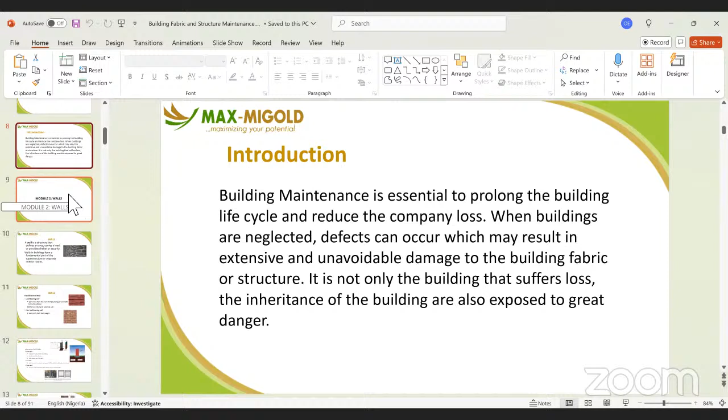So it is important for us to always maintain a building from time to time, check the different components of the building and how it works. Now we shall be looking at the building into different components, different modules.

We're looking at walls. A wall is a structure that defines an area and carries a load or provides shelter or security. Walls in buildings form a fundamental part of the superstructure or separates the interior rooms. Walls is that part of the building that transmits the building load to the foundation, and the foundation transmits it down through the earth.

Foundation is that part of the building that has direct contact with the earth, with the ground, the earth crust, with the earth itself. And every building must have a foundation. There are different types of foundation, 4 basic types, just for classification.

There are more subheadings, but the basic classifications: you have the strip foundation, you have the pad foundation. Strip foundation is a traditional kind of foundation where you just dig through the ground, you pour a little bit of concrete, and then start setting blocks up. A traditional way of building.

Pad foundations are majorly used for the underneath of columns. If you go around and you see street lights, you see these concrete cubes that are underneath the street lights where the street light stands on. Those cubes are called pad foundation.

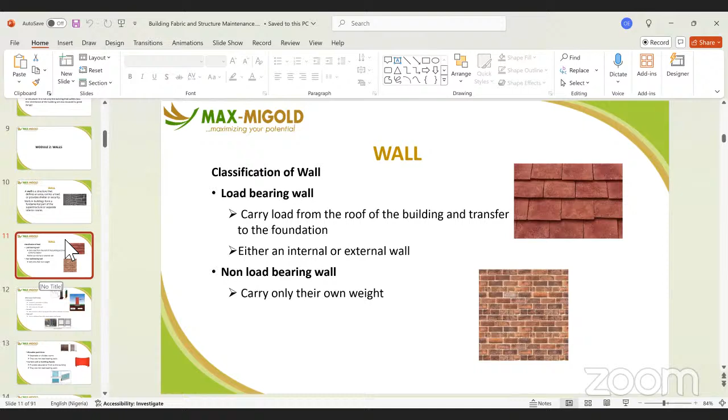Other types of walls include party walls. Party walls are just partition walls that are used from place to place to separate buildings. They are major walls, good for sound insulation and also good for firefighting.

We also have firewall. Firewall is used to separate two structures, and it has a lot of fire resistance embedded into it. You have shear wall. Shear walls are built walls that are built to withstand wind or earthquake.

They are normally found in high-rise buildings. Shear walls are used in high-rise buildings a lot of times to be able to keep the building in form so that the building does not collapse. The shear walls are normally at the core of the building, and they use that to stabilize the building so that the wind effect that may arise, that may have impact on the building, does not bring the building down.

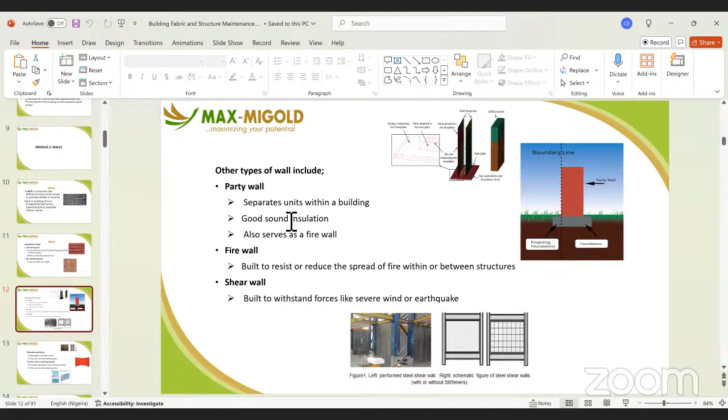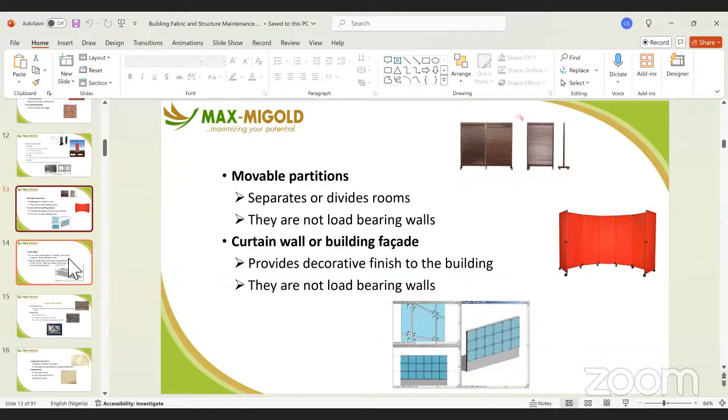You have movable partition walls, curtain walls, or building facade. Curtain walls are becoming increasingly popular around Nigeria. Glass facades, curtain walls made of glass, just to give the building some decorative and fine feel. They are not load-bearing walls at all. They don't carry the load of the building because they are actually for beautification and decoration of the building.

You have the cavity wall. A cavity wall is constructed in two leaves, or skins, which are separated with a cavity in between. Cavity walls help prevent rain reaching the internal wall surface of the building, and are generally not load-bearing walls. They just form a cavity in between. It also helps control a little bit of sound, giving some proofing to the inner walls, because where you have a cavity, you have a little bit of air in between.

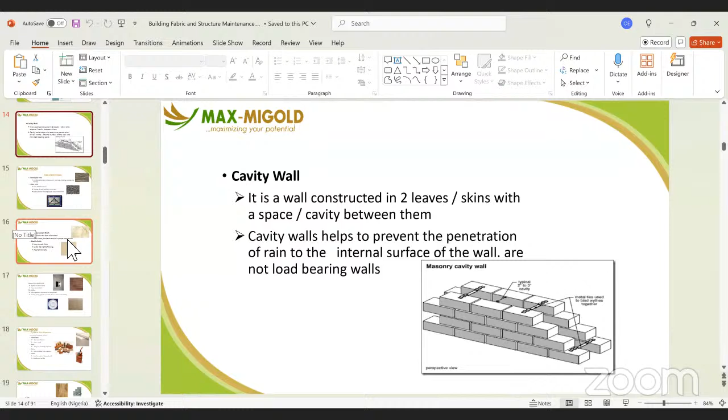Types of wall finish: you have stained glass finish, which you find in cathedrals, churches, and mosques, especially those old churches like Catholic, Anglican, Baptist, or Methodist churches. You find those stained glass finishes in some mosques too. Religious areas generally, you have that.

You have pebbled finish, where pebbles are put on the wall. It makes it look attractive, and is best suited for building facades and around waterfalls or water fountains.

You have plaster cement finish. This is the regular one where you mix sand and cement with plaster sand and just plaster the wall. That finish is also a kind of finish.

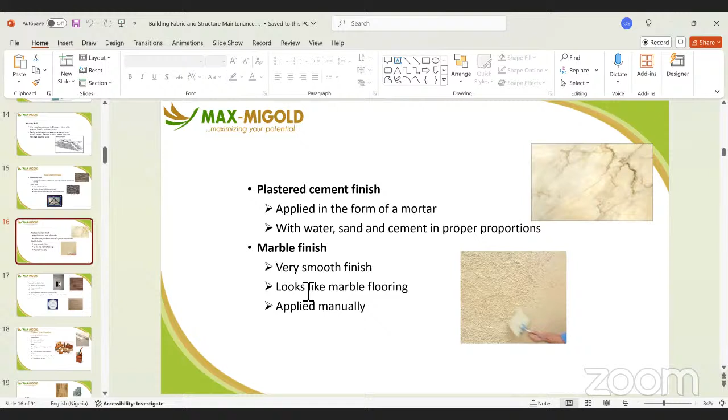You also have the marble finish. This is when you use marble to finish the wall. They're very smooth and look more beautiful, like a good marble floor.

You have the POP, plaster of Paris finish. This is when you apply POP, especially on the internal walls. It makes it smooth and look very nice.

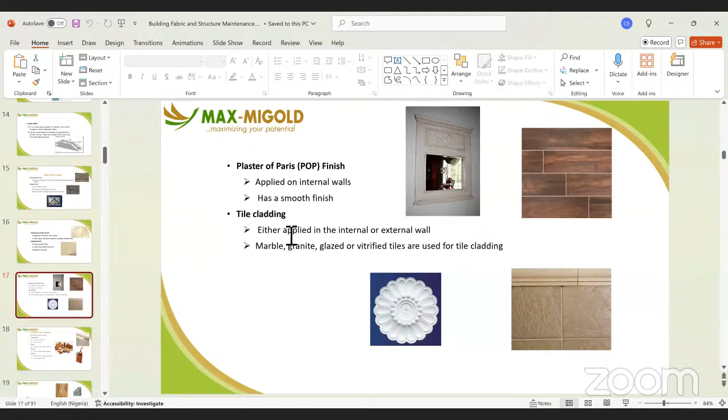Tile cladding: this is when you use tiles to finish the wall, like in toilets, bathrooms, and some areas in the kitchen, so that it looks nice and is good for water resistance.

Types of wall materials: you have plaster boards. Plaster boards are used for dry walls most of the time. They are good for sound, very cost efficient, and easy to install. It's cost efficient because you can reuse them. When you decide you don't like the position of the wall, you can easily take it out and reinstall, unlike brick, which you have to break. Brick is more permanent than using a plaster board.

You have brick walls, you have mortar, you have plaster. Those are some types of wall materials.

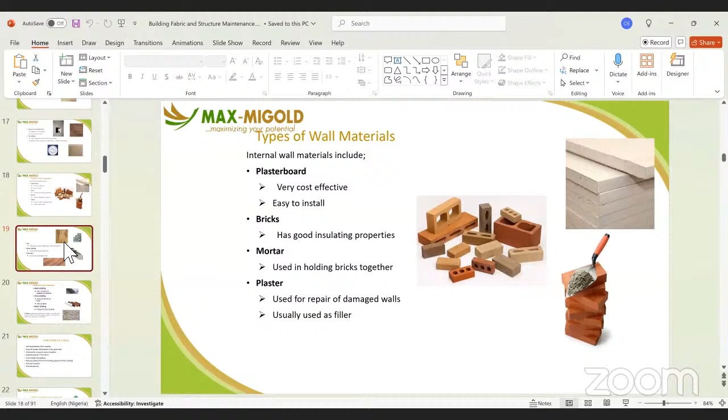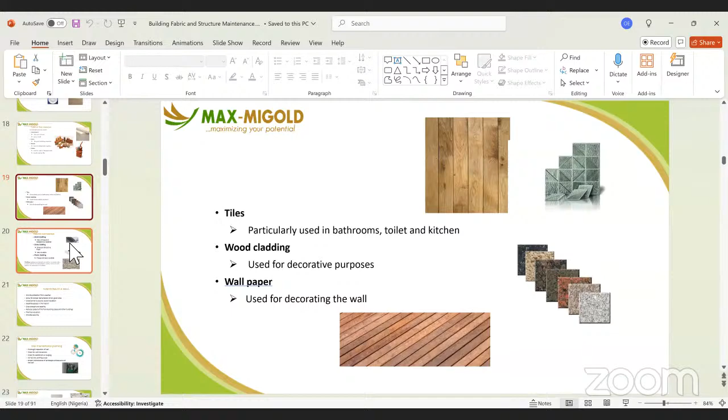You have wall tiles, wooden cladding, wallpaper that can also be used for finish. Wallpaper is becoming increasingly popular around here these days because people are now using more wallpapers to make their wall look decorative.

External wall materials: you have metal cladding, which you call the Alucobond. You have stone cladding, stone finish, just to make the wall look nice, as though you cut stones into small pieces and attach them to the wall using mortar. You have plastic cladding, this is also like having a plastic Alucobond that they just use to clad the wall to make it look nice.

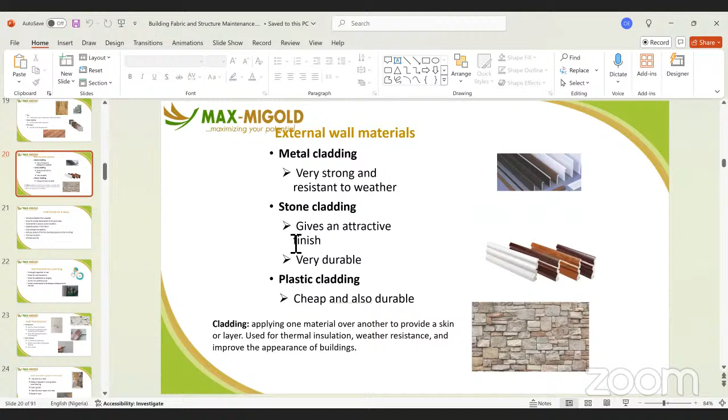Cladding is applying one material over another to provide a form of skin used for thermal insulation, weather resistance, and improves the appearance of the building. That is what cladding does. Cladding improves the functions of a wall.

It provides protection from weather, allows for proper demarcation of given areas, gives barrier to sound and sound insulation, separates spaces in the interior, gives strength and stability to the building, reduces spread of fire from one building space to the other, also helps in thermal insulation, and provides security to the inhabitants inside the other side of the wall.

Wall maintenance plan: normally we advise that once you get into your facility, one of the first things you do is walk around the facility. You check your walls, and during inspection, you check for wall movement.

We check for wall movement, especially if it's a new structure. After a while, the building will settle, and once it settles, it may show some level of cracks, especially when it's a natural settlement. Check for building settlements and correct all settling issues. When a building settles, sometimes it forms cracks. Those cracks are normally not structural, but when they are structural, it means it has affected the foundation and the foundation is failing. In such a case, you may need to tear down the building.

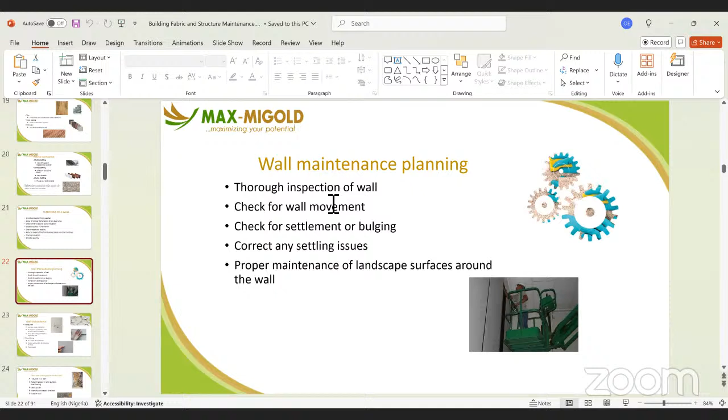Wall maintenance, flaking paint: this is when you have moisture within the wall. Once the moisture dries off, the paint begins to flake. Once that happens, you scrape out the flaking areas and apply a little bit of surface treatment, then paint over it.

Chalking paint, same solution, may be as a result of weather or bad paint material, bad quality of paint. Prepare the surface, remove the chalking, and then just repaint.

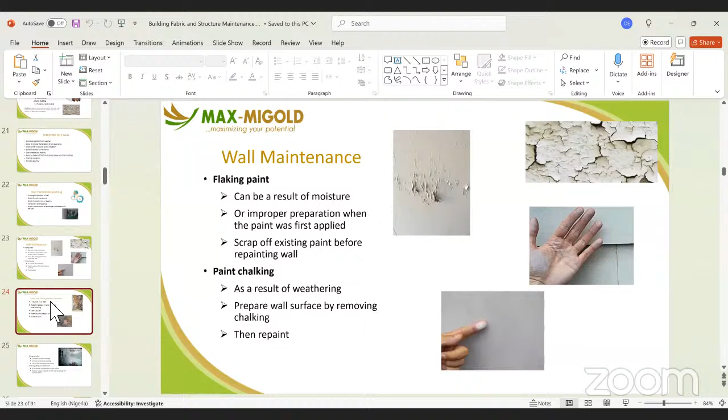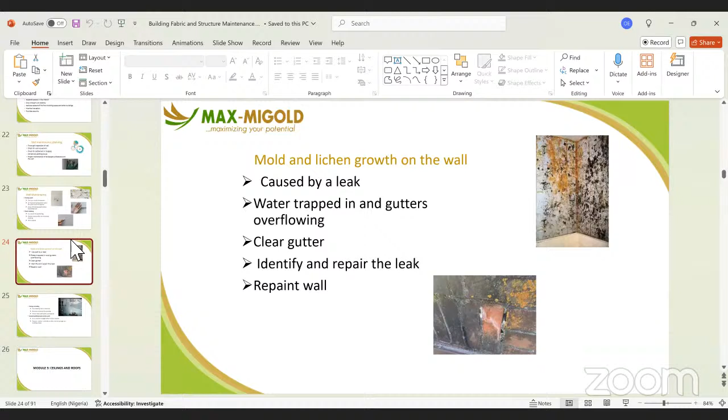When you have mold growing on the wall, this is normally caused by leakages, water trapped in gutters, and gutters overflowing. Once water is trapped in the walls, it causes moisture and mold. So you need to clear the gutters, check the AC condensate pipes in the wall to be sure they are not broken or leaking inside the wall. Once you isolate and fix the leaking problem, you can repaint the wall, scrape it, sand it, prepare it, and then repaint.

Fixing corroded pipes: when pipes have corroded due to salt or moisture, which used to be a serious issue in the days we used galvanized pipes, you remove the corrosion by sanding, then fill the hole with putty and repaint that area.

Sealant getting weak at joints - this is when you use UPVC pipes. The sealant at the joint sometimes gets weak. We may need to look at that, take it out, and refix it so that any leakage into the wall stops and the damage done to the wall is minimal.

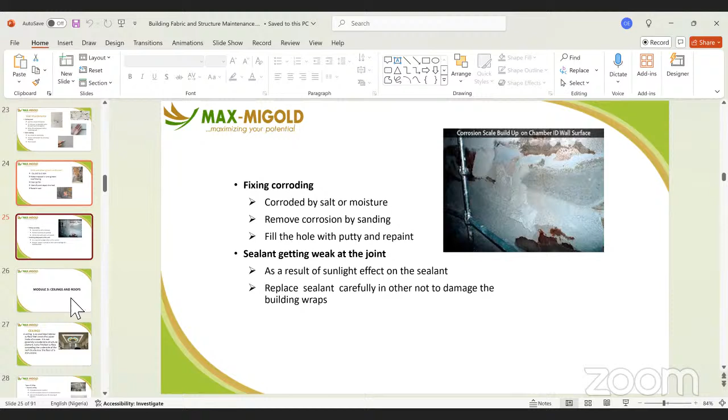Ceilings and roofs. A ceiling is the overhead interior surface that covers the upper limit of a room. It is not generally considered a structural element, but a finished surface concealing the underside of the roof structure or the floor of the story above.

Different types of ceilings: you have acoustic ceilings that are good for sound insulation, drywall ceilings made of plasterboard, suspended ceilings used for general office areas, and cathedral ceilings, which are specially designed ceilings found in cathedrals.

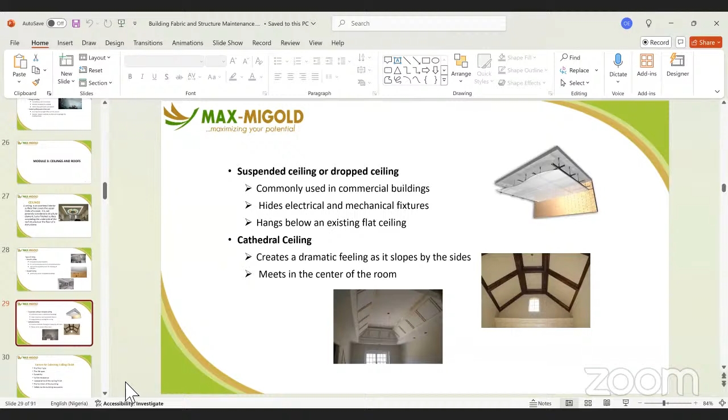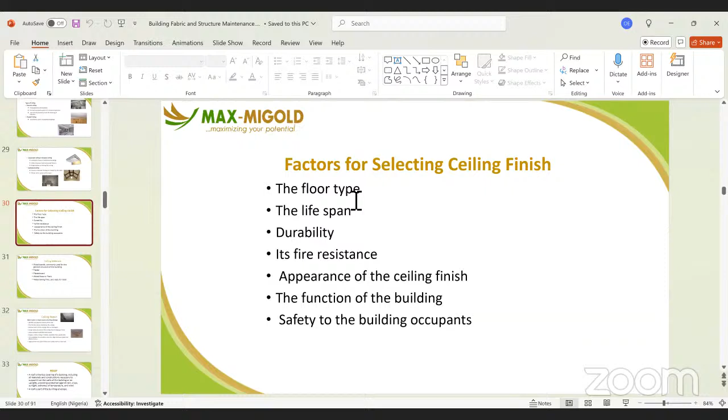Factors for selecting ceiling finish: the floor type can be a factor, the life span of the building can be a factor, durability can also be a factor, fire resistance or capability can also be a factor. Appearance of the ceiling finish, function of the building, and safety of the building occupants - all these are factors that affect the selection of ceilings.

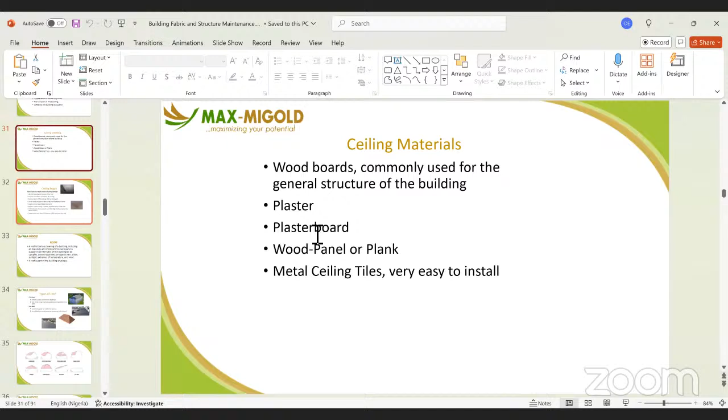Ceiling materials - examples include wood boards, commonly used for the general structure of the building, plaster, plasterboard, wood panels or planks, and metal ceiling tiles, which are very easy to install. These also help when you have suspended ceilings, used more in commercial buildings or big office buildings for ease of installation and maintenance.

Ceiling repair: water is a major source of ceiling damage. Identify and stop the source of leakage. Dry the area above and below the ceiling. Remove parts of the ceiling that are damaged. Scrape away any part of the ceiling that is loose or bulging, then leave the ceiling if it's still flat and smooth. Replace the entire ceiling if the plaster separates from the wood laths.

Use sandpaper to smoothen the ridges between the good and affected area. Apply primer and paint if there are visible stains on the wall. You must learn to just apply primer and paint to treat the wall.

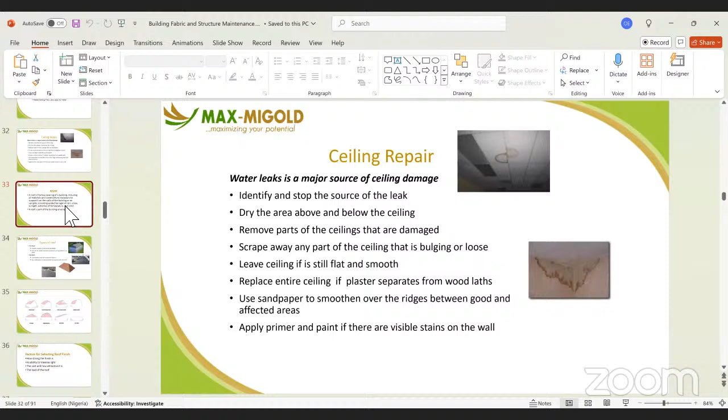It's very important. And for roofs: a roof is the top cover structure of a building, including all materials and construction necessary to support it on the wall of the building or upright, providing protection against rain, snow, sun, extreme temperatures, and wind.

A good roof is part of the building envelope. You must know that the roof is part of the building envelope.

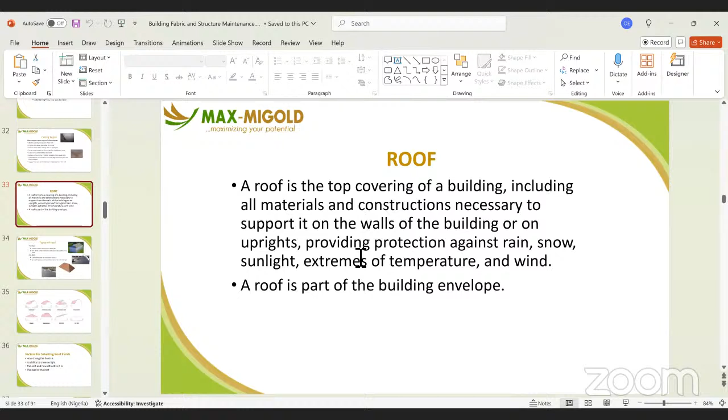There are different types of roof. Majorly, you have the flat and the hip roof. Flat is when it is flat with just a very gentle slope, and hip is when you have different rising of the roof.

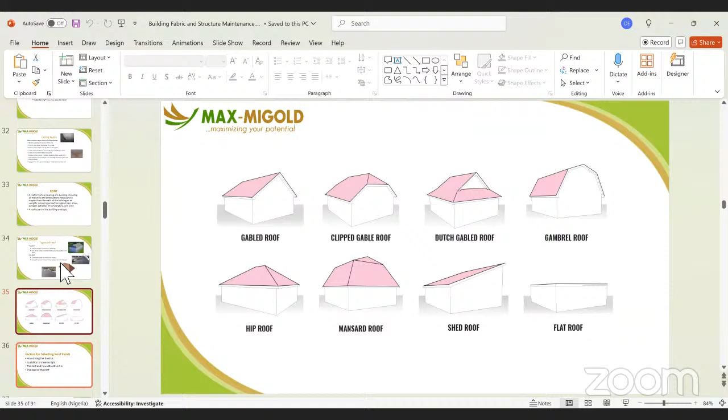You have this image giving an example. You have the gable, you have the clip, you have the hip roof, you have the shed roof, you have this flat roof, you have the mansard roof. So whichever one your building takes, it's important you look at that.

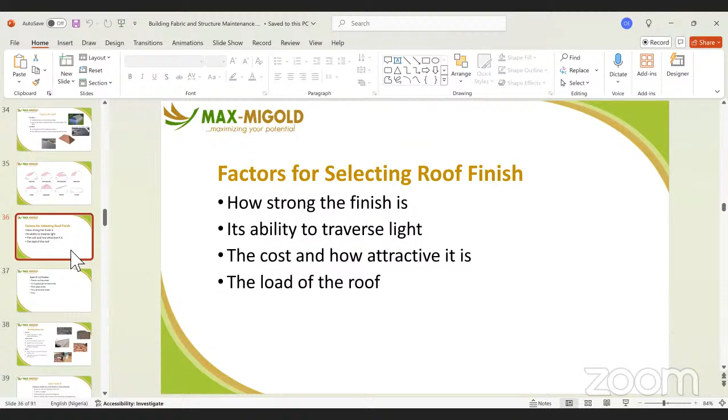Factors for selecting roof finish: how strong the finish is, its ability to transmit light, the cost, and how attractive it is. The load of the roof itself is also a factor that helps to select the type of roof.

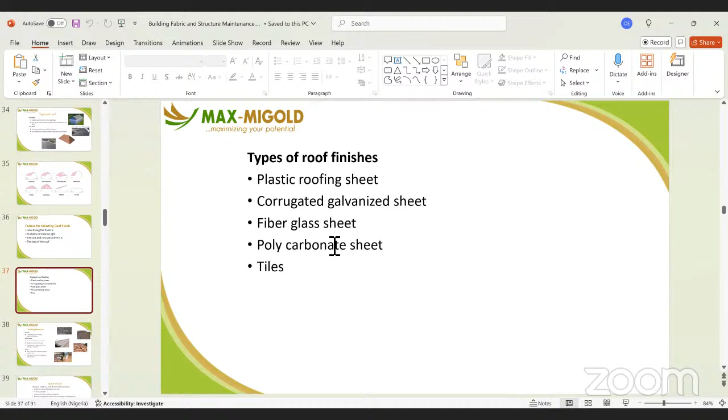Types of roof finish: you have the plastic roofing sheets, the corrugated galvanized sheets, the fiberglass sheets, the polycarbonate sheets, and tiles.

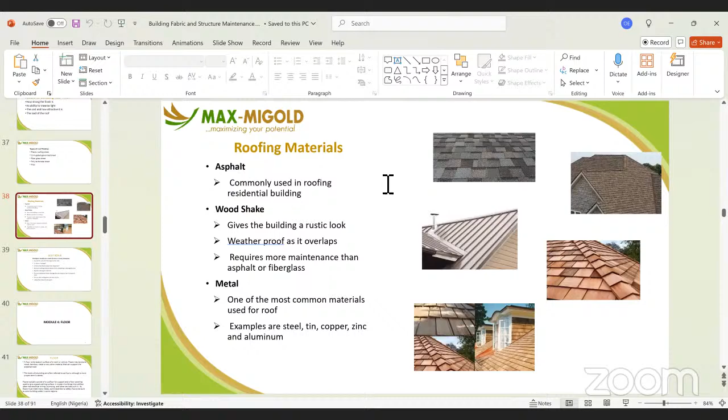Roof materials: asphalt can be used, wood shakes can be used, metal can be used, which are the long span aluminum and so forth.

Roof damages, roof repairs. Damage is usually as a result of storm or heavy downpour. Assess the extent of damage on the roof.

Check if there is a leakage. Check if there are holes on the wall or the roof that needs to be repaired. Remove roof material down to the sheathing in damaged areas, and then replace the damaged material.

Prevent additional water damage by ensuring the roof is properly tiled. Ensure the roof gutters are free of debris, allowing free flow of water at any point in time on top of the roof.

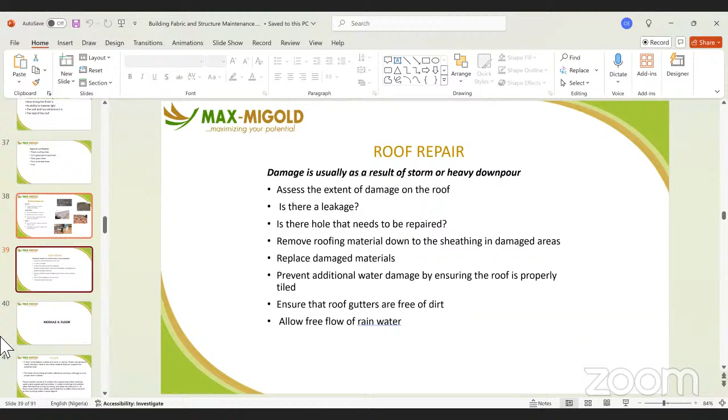Floors. A floor is the bottom surface of a room or a vehicle. Floors may be stone, wood, bamboo, metal, or any other material that can support the expected load being designed for.

The levels of a building are often referred to as floors, although a more proper term is story. Floors typically consist of subfloor for support and the floor covering used to give a good walking surface.

In modern buildings, the subfloor often has electrical cabling, plumbing pipes, and other building services going through or under it, as the floor must meet many needs, especially essential safety needs. The floors are built to strict building codes in some regions.

So there are different types of floor. We have laminate floor. Laminate floor is resistant to stain, rarely fades, very durable, and very easy to install.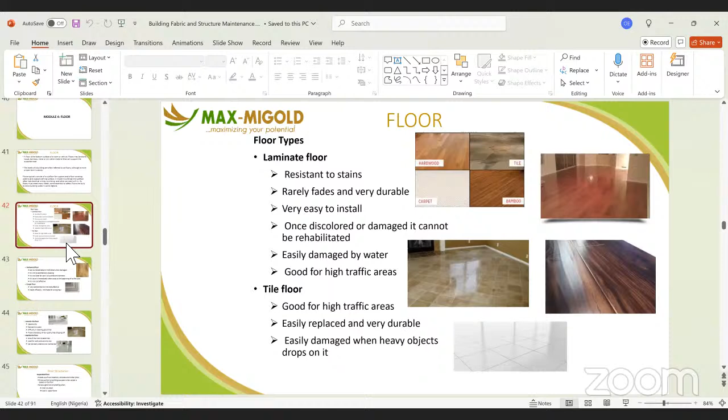You have tiles, floor tiles, good for high traffic areas, as they're easily replaced and very durable, though easily damaged when heavy objects drop on it. But tiles are very good because once damaged, they can easily be replaced.

You have wooden floors. Floors can be rehabilitated easily or refinished when damaged. It is not so aesthetically pleasing, but some, when properly done, look very nice. It is not ideal for use in a business environment.

It's better for houses, individuals. Its value is immediately taken away at the beginning of its life cycle because wood is not cost effective, as wood in itself deteriorates fast. But when properly seasoned, you can use it for years and years, having the right amount of wood.

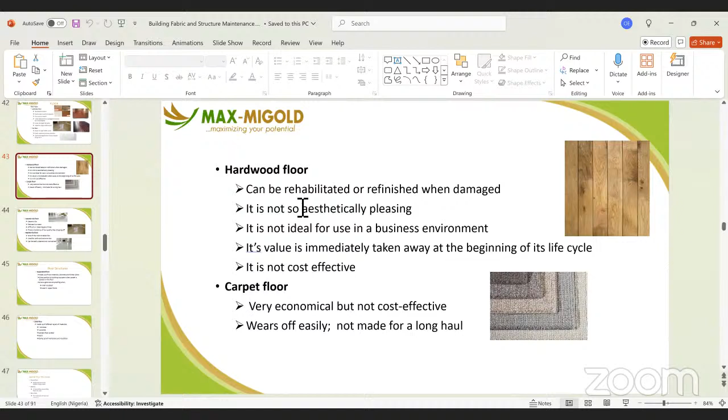Carpet floor tile is very economical but not cost effective. Wears off easily, may not be made for the long haul. That is, carpet is not to be used for a long time. It's just for a short period because you have to change it from time to time since it fades out easily, gets damaged, and all that.

You have ceramic tile floors, made of ceramic materials, actually water resistant, with difficulty in cleaning the grouted lines. That's where you have dirt hiding in it. There is a tendency of low quality tiles chipping off at the edges due to low quality of the material.

You also have marble floors. Marble is quite expensive and it's quite durable. When you're able to maintain it and polish it properly, it looks good, nice, and very beautiful.

Marble is used for both walls and columns too, not just for floors. It can easily be cleaned and maintained. When it is properly cleaned and maintained, it looks very nice all the time.

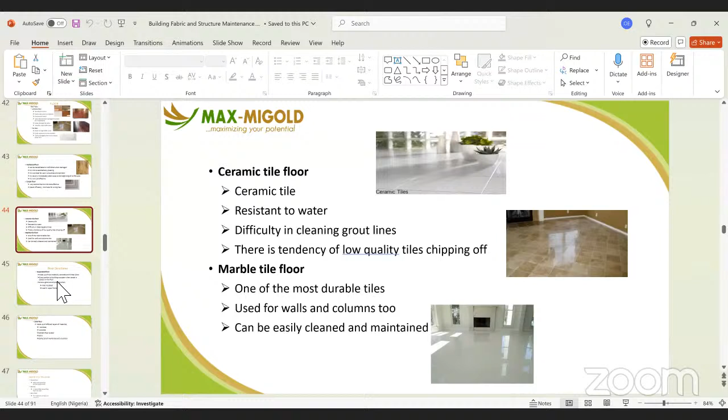It gives a very good impression. You also have suspended floors made up of two materials. Sometimes you have concrete and timber joists that are used for this suspended floor. It gives comfort to building occupants when carpet is spread on top of it.

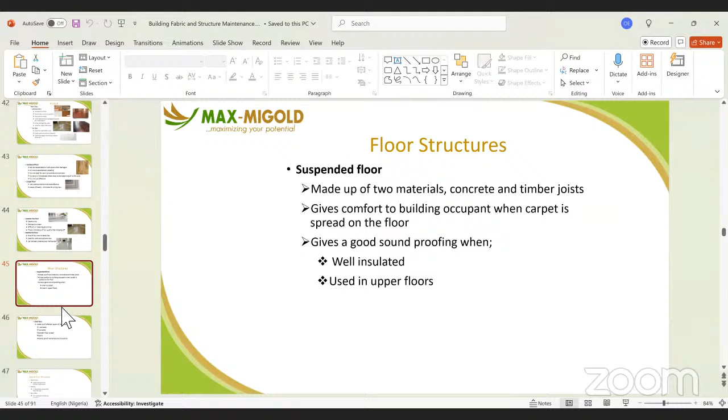It gives good soundproofing when well insulated and used in upper floors, because wood in itself is a soundproof material, so it doesn't allow so much noise to emanate from it. When properly installed, it just absorbs the noise that may likely come from the wood itself. So it's actually a very good material, but it's not too popular in use anymore.

You have solid floors made up of different materials for setting it up. You have the sub base, which is almost like the base where the floor comes on. You have concrete, which comes on the sub base. You have the cement floor screed, sand, and damp-proof membrane installed - the damp-proof membrane, damp-proof course - then they form that form of insulation.

The damp-proof course or damp-proof membrane is to help prevent damp and capillary rise from affecting the building itself. Special floor structures include raised floor.

Raised floor gives easy access to utility underneath. Raised floors are normally used for office spaces or server rooms where you have a lot of cables running underneath the floors, and they just need somewhere to tuck the cables in so it doesn't look too ugly to the eyes. You also have balcony, a raised floor projecting from the wall.

Balconies are normally attached to the building. Sometimes it could be a secondary thought to the building design. However, if it's planned along with the building plan itself, it looks very good and nice. That's for balcony. You also have glass floors.

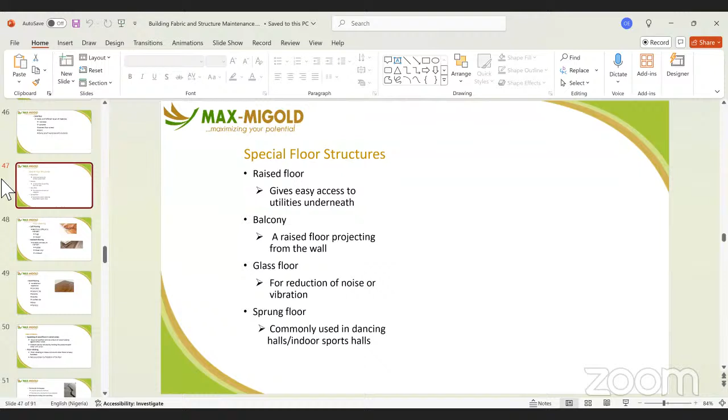Floor coverings - you have soft flooring, warmth but difficult to maintain. That's your rugs and carpets. They're nice, they look very nice, they're warm. Some people do not like carpets because it causes a lot of irritation for them, because if you don't clean very well, you have dust hiding inside the carpet.

And when you want to now do thorough cleaning, the place becomes extremely dusty, which can also affect the health of people that are working, or the cleaners that are working. It's not always as durable as it should be, because it has a tendency of fading away and losing its initial essence.

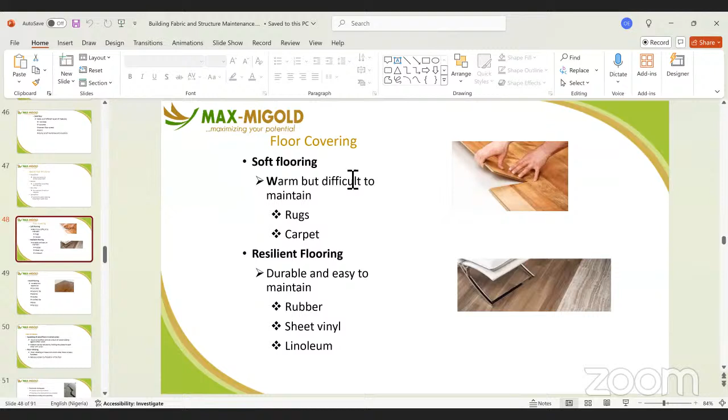Resilient floors are durable and easy to maintain. You have rubber floors, you have vinyl sheets, and you have linoleum, which helps also to distribute those around the floors. It's just like epoxy, making it look very nice.

You also have hard flooring, durable but expensive. You have concrete floor, ceramic tiles, granite, marble, vitrified tiles, brick where applicable, and terrazzo - my personal favorite. They're very hard floors. I love terrazzo so much.

It's so beautiful. If it's properly installed, you don't need to do anything on the floor. You can just wash it properly and clean it. You will enjoy having terrazzo in your house. It's very durable, very durable. It's extremely nice. I like terrazzo so much.

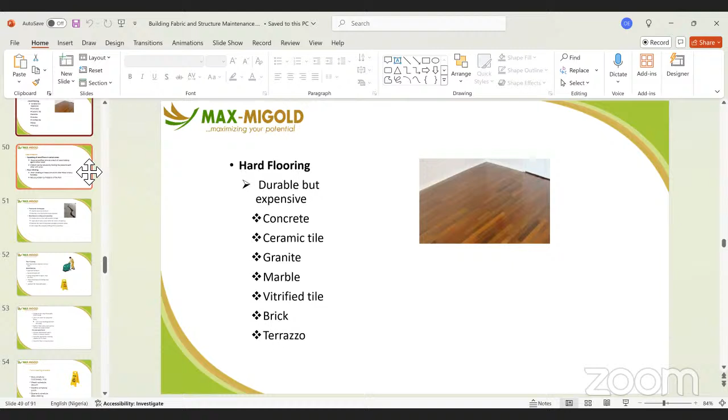Problems associated with floors: you have squeaking of the wood floor in certain areas. This occurs at subfloor joints as a result of wood rubbing on each other. The problem can be reduced by holding the pieces to each other with screws - you just screw the places that are coming out properly, and then you solve the problem.

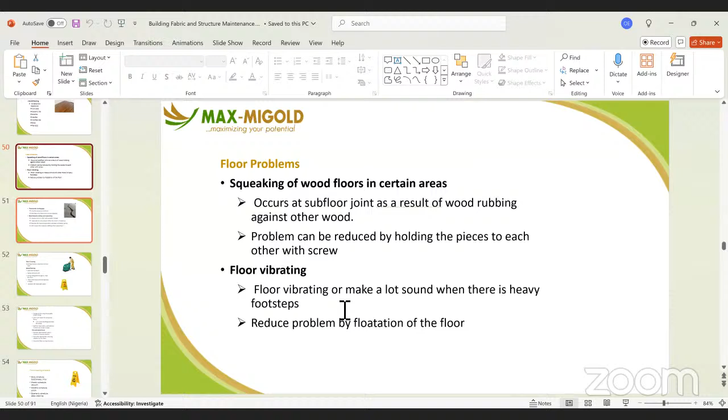Floorboards having gaps is usually caused by moisture. The floor is very moist when installed, and when it begins to dry out, it gives way, affecting the wall surface. This is something that will need attention. Wooden boards can crack and separate.

Separation usually occurs in line with weather changes, especially in the rainy season when the room is heated up. Monitor the room temperature and take corrective actions to reduce the seasonal shift of the wooden floor, because wood reacts well to the environment and weather. Once there is cold weather, it absorbs a lot of moisture. By the time it gets to the dry season, the wood will dry out and begin to form gaps at different areas.

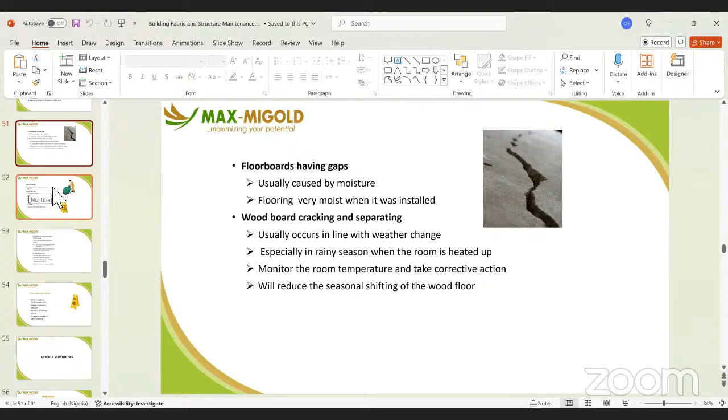Floor cleaning: the cleaning method depends on the type of floor. For wooden floors, clear the furniture, wipe all loose dirt away from the floor, going along with the grain, and mop the floor. Add a few drops of cleaning soap into the water, damp the mop with water, and then commence washing.

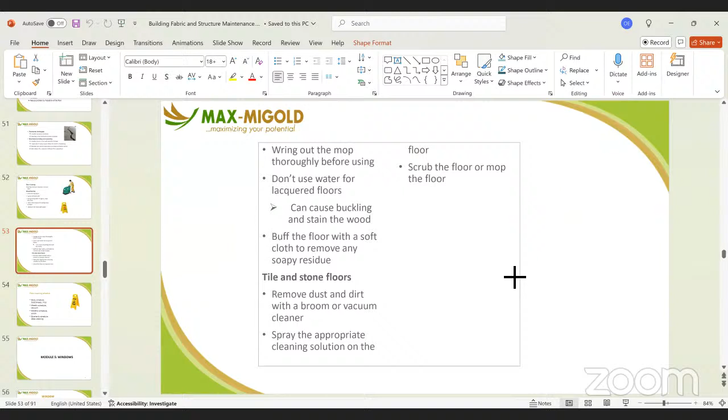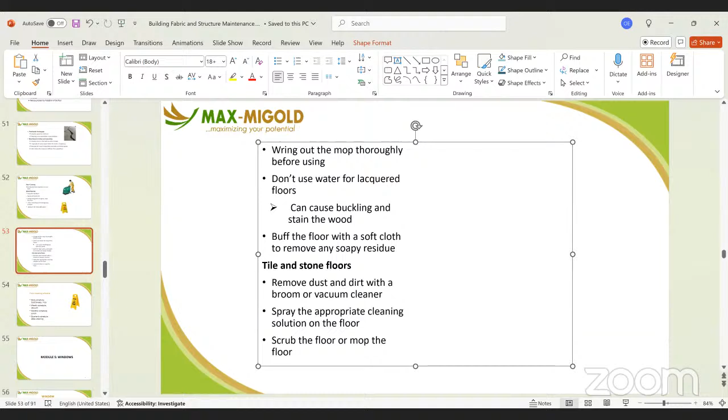Tile and stone floors: remove dust and dirt with a broom or vacuum cleaner. Spray the appropriate cleaning solution on the floor, then scrub the floor or mop it. After you scrub the floor for all the dirt, you then add your mop to mop it.

Cleaning schedule: you look at different schedules of cleaning, especially for floors. The daily schedule is to dust, sweep, and mop. This is a regular occurrence - you need to clean the floors, sweep them, and mop.

For the weekly schedule, we expect that at least once a week you should do a bit of vacuuming the floor, taking out stubborn stains that might be hiding around the tiling grout - you just wipe those away. You also look at a monthly schedule, where you probably plan to polish the floors.

These schedules are just high level; you can modify them depending on the material and floor type in your facility, and how you're able to maintain and manage them. The quarterly schedule involves deep cleaning every quarter in the year - schedule at least one deep cleaning to keep the floor in good, pristine condition.

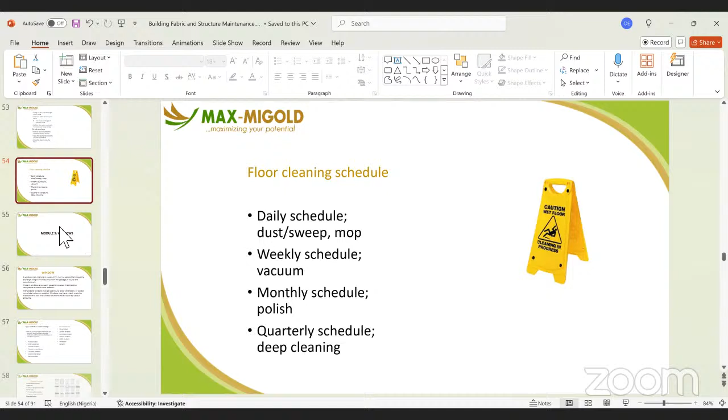It's very important that all the different components in the building are properly maintained. Once you maintain the building properly, it will always look good and not deteriorate fast. This means you, as a facility manager, are doing a good job. People coming into the property will be happy that their facility is properly maintained and looks pristine, and that gives you a plus as a facility manager.

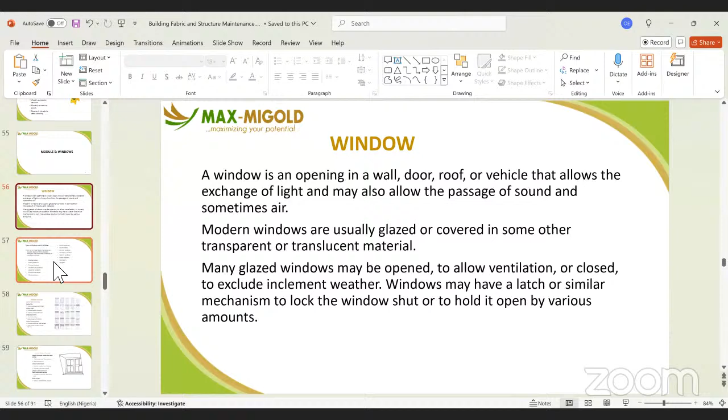Types of windows used in a building. There are so many types of windows available based on their position, material, functionality, or functioning parts. Windows are classified as follows.

You have fixed windows. Fixed windows are just the ones that are fixed - they don't close, they don't open, they're just permanently locked. It just throws light into the space.

You have sliding windows. You have pivoted windows, the one that you push out. You have double hung, it hangs twice. You have louver windows. You have casement windows that open like doors.

You have metal windows. You have corner windows. You have bay windows, dormer windows, lantern windows. You have gable windows. You have ventilators.

You have skylights. Skylights are normally located on the roofs and ceilings so that when you open it, it throws light directly from the sky into the space.

Window covering: you have internal window coverings, applied films. You can have films on the wall or on the window to tint it or reduce the amount of sunlight and ultraviolet ray coming into the space.

Cellular shade provides excellent insulation and improves energy performance. You have drapes and curtains, what some people call drapes, used for decoration and to give privacy to interior spaces.

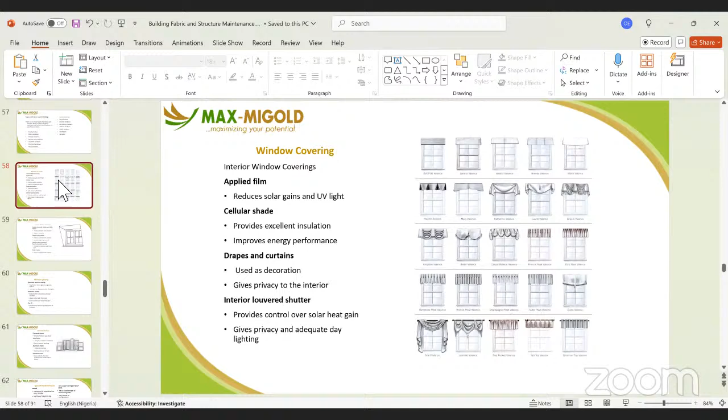You have internal louver shutters, which provide control over solar heat gain and give privacy and adequate demarcation from the back of the window, with adequate lighting. You use that to control the lighting coming into the space.

External window covering: you have external louver shutters and roller shutters, which protect the window from weather and improve security. External shutter shades, roller shades, protect the window from the weather and provide solar control.

External solar screens and fixed retractable awnings provide control over solar heat gain. Roller shutters protect the window from the weather.

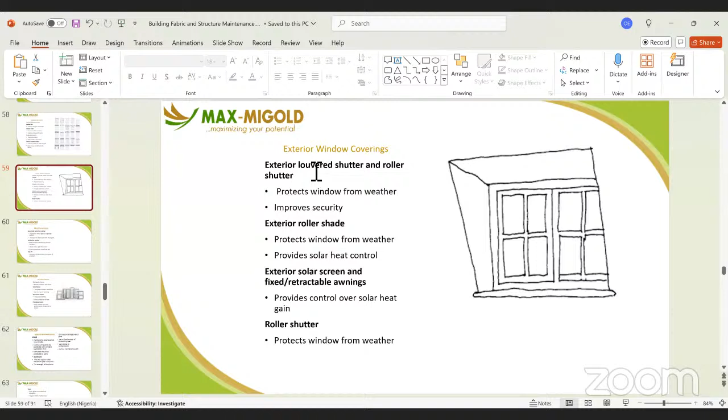Window glazing: you have a spectrally selective coat applied on tinted glass to a glazing system, which increases or decreases the solar heat gain that comes into the space.

You have reflective coat, what some people call reflective glass, which reduces the transmission of solar radiation into the space and blocks more light than heat, giving control over solar heat gains - those reflective window glasses you see.

It looks like a mirror from the outside - you will not be able to see inside, but from inside, you see outside clearly.

You also have gas-filled windows. If you have ever traveled by aircraft and sat by the window side, first of all, the windows of the aircraft are fixed windows.

You can't open it. If you look at those windows, you see there are two glasses, and in between the glasses is filled with gas. Such windows are good for thermal control and improve thermal performance of the window.

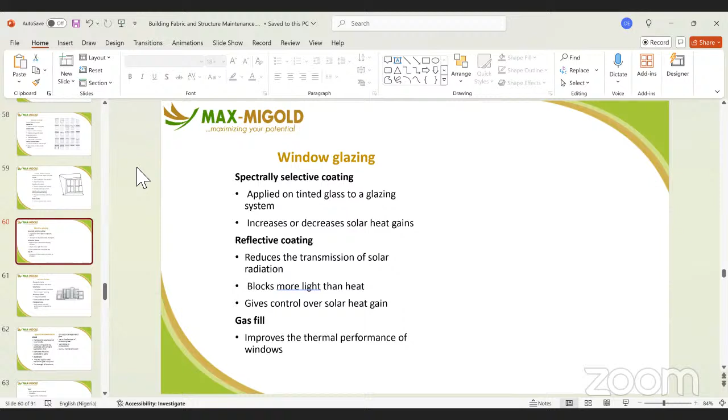It's also very good for sound insulation. For high-rise buildings, they use more of this kind of window because of the sound and wind pressure at higher levels, at skyscraper level. So they use this kind of window.

Window frames: the frames can be made from composite material with resistance to moisture and decay. You have vinyl frame, which is good resistance to moisture and doesn't require painting. You have aluminum frame, which reduces heat flow but is a good conductor of heat.

You have the fiberglass frame, which gives better thermal performance compared with wood. You also have the wooden frame, wood.

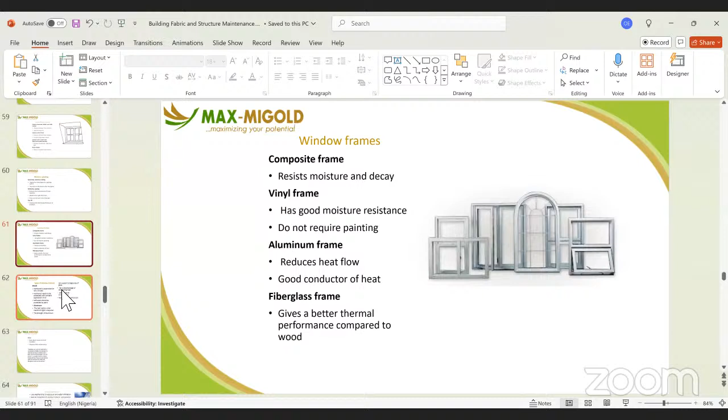Types of window materials: you have wood. Hardwood is expensive but durable; hardwood needs to be protected with constant application of oil. Soft wood will be protected by paint.

You have aluminum. Aluminum is becoming popular, the best option when maximum light is required. The strength of the aluminum can support a large area of glass.

It has a disadvantage of conducting heat and is very prone to condensation, but has low maintenance cost, because once aluminum is there, aluminum is there.

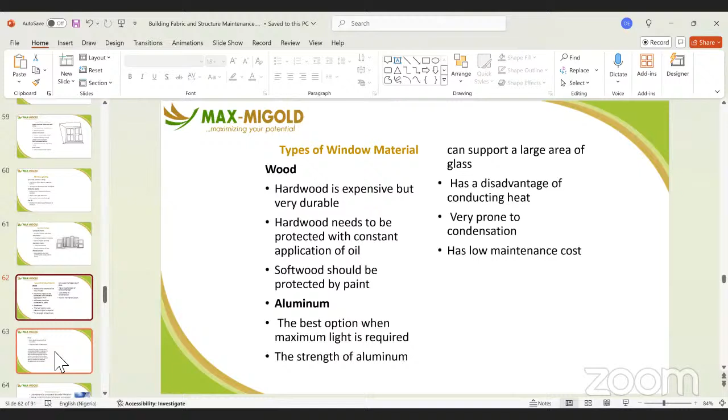Vinyl gives good sound and heat insulation and requires little maintenance. Windows can be made from a combination of different materials.

For example, aluminum windows with a steel casement and wooden core can be put in a wooden frame to reduce loss of heat. There are also windows with real wood on the inside and fiberglass vinyl on the exterior.

Just to mention a few types of windows. Now, windows maintenance - use weather strips to reduce air and water infiltration into the space.

Regular inspection of the windows, interior and exterior, is one of the things you need to do. Check window hardware, locks, and opening mechanisms to find out that they are still in place.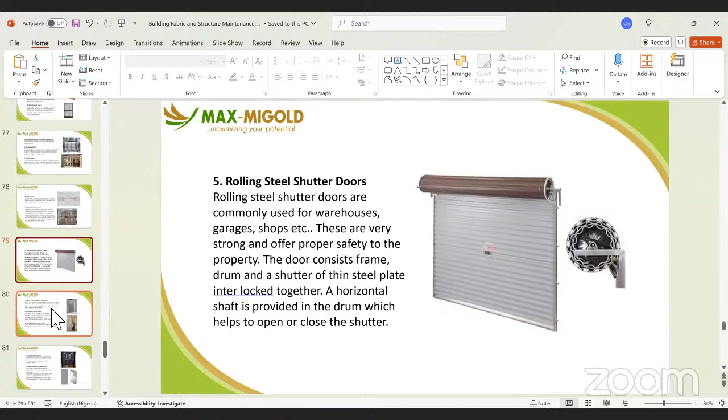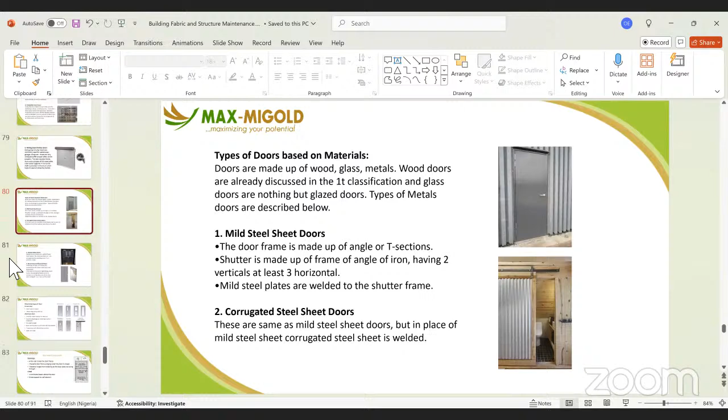You have the metal covered plywood door. That is, the door itself is covered by metal, but inside it is made of plywood.

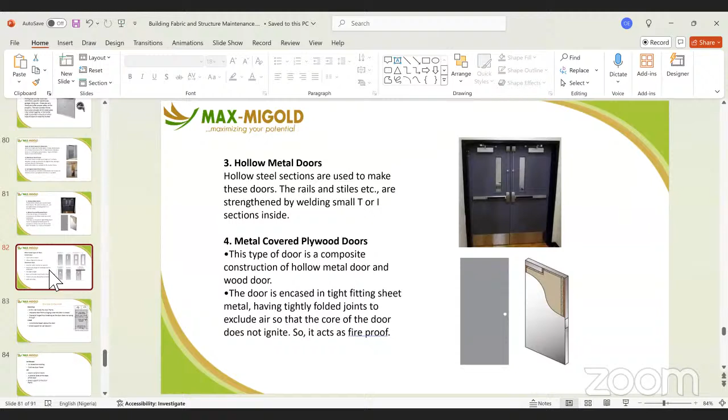You now have other broad types of doors. The French door opens up to a space, allows a big entry and exit. That's for French doors.

Aluminum doors used for either interior or exterior, have the advantage of resisting weather. They are lightweight and do not transfer much load to the foundation. The frame is not affected by termites and they last longer.

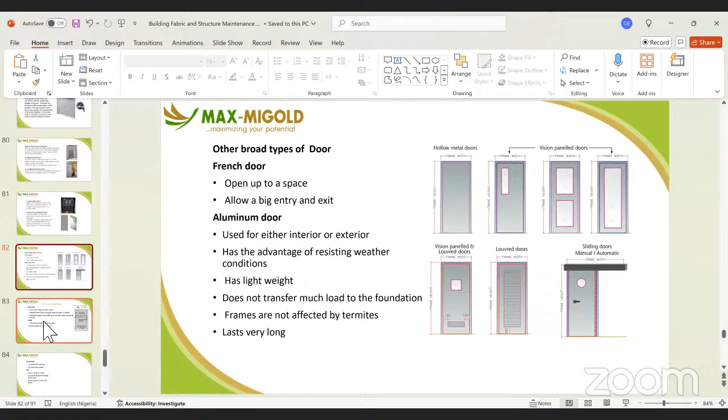That's for aluminum doors. The different components of the door: the stopper is a thin sheet inside the door frame. It prevents the door from swinging to the other side when the door is closed, and prevents hinges from breaking as the door does not swing through.

You also have the lintel. The lintel, like I mentioned earlier, is the top part of the window or the door. The bottom part is called the sill. The architrave is the one that's on the face of the door around where you have the door frames.

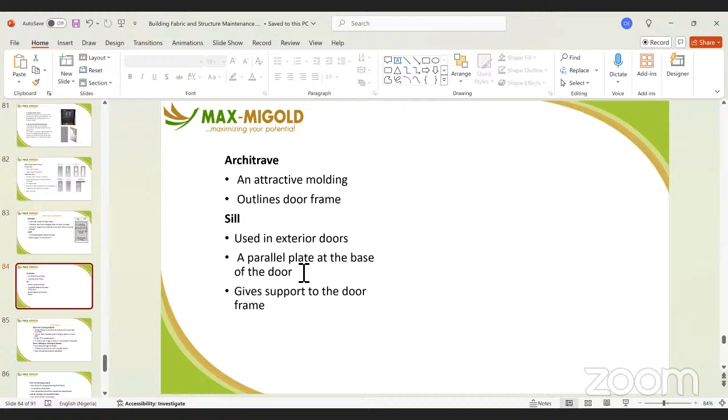The sill is the bottom part of the external door. It's like you have a parallel plate at the base of the door that gives the door some level of support. For door repairs, when the door does not close properly...

Check if the door is swollen as a result of very humid weather. That will happen to wooden doors when they soak moisture. After a while, it swells, and once that happens, the door may not close very well. If it's as a result of high humid weather, and that problem is common to wooden doors, allow the wood to dry properly, and then it will adjust itself.

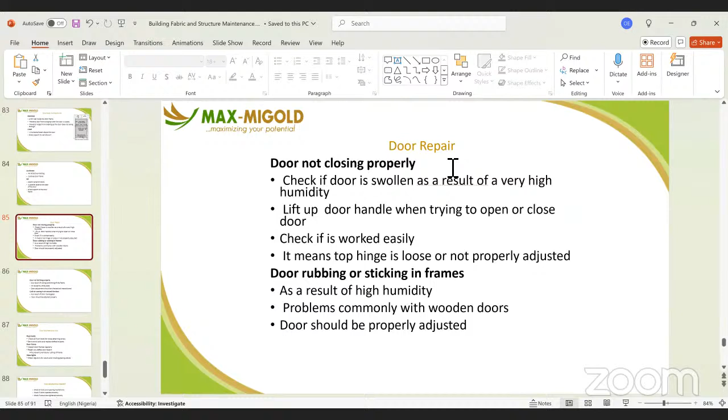The door may not latch properly as a result of wrong position of the frame, or caused by the strike plate. The strike plate is that part beside the door where the door jumps into and locks. Sometimes if it's not properly located, it may not latch well. Door adjustments should be checked and repositioned.

Cold air coming in around the door - this is when the gap of the door is too much. As a result of the door having so much gap, the door should be adjusted properly to reduce that issue from happening.

Flush bolts checked. When you have issues with the flush bolt, check all flush bolts for loose attaching screws. Service the flush bolts, add oil and replace defective parts.

Door frames: inspect door frames regularly, repair any defects and paint them to prevent premature rot for the door. Glass slides: check regularly for cracks and missing panel pieces when you have a glass inset in your doors.

Door maintenance checklist. Normally, once you have your facility, you should just have a small checklist for the doors. You check the door locks and opening mechanism that they are functioning well. Check the door operation that they operate smoothly. Check the door screws that are tightly secure.

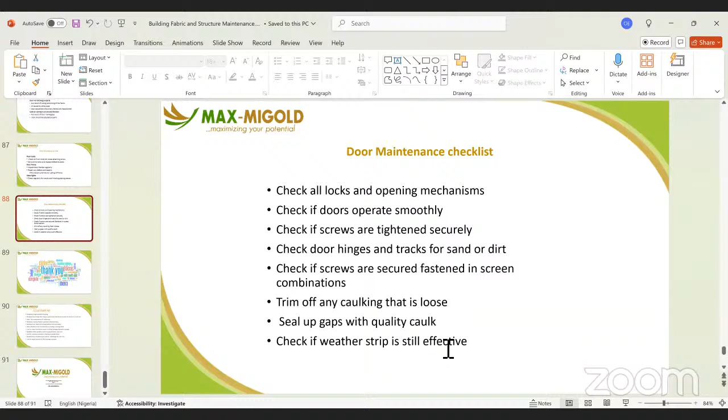Trim off any caulk that is loose. Seal up gaps with quality caulk, and then check if the weather strips are still effective in the door mechanism itself.

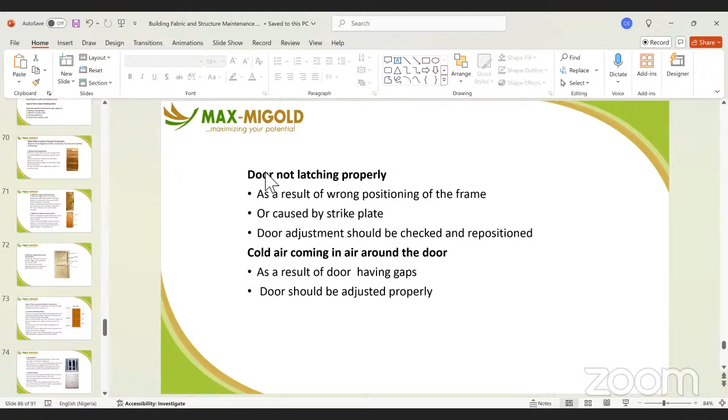Good evening, sir. Thank you, sir, for the privilege to ask this question. From experience, both in office and home, sometimes you see walls as if maybe they are peeling, maybe the paint is peeling. Probably it could be as a result of water, maybe from the top, water flashing on the wall, or probably because the block is not quality. I don't know. But what I'm asking is, from your experience, which type of wall do you think is the best to avoid this, each time you paint a piece you have to scrape and repaint and all that? Thank you.

Okay, just to answer your question, first of all, once you have that kind of situation you have just mentioned, it may be as a result of the construction of the wall itself. And once the blocks that are used for the construction of the wall are not the right standard, it will also be a problem. And by the time you are plastering, they should also use the right mix of plaster sand when they are doing plastering. It also affects the wall itself.